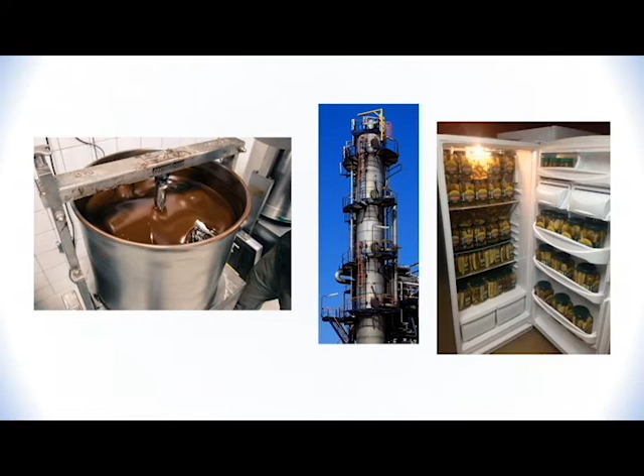Why are fluids important to learn about? The reason fluids are so important is that engineers deal with fluids in almost any process that they work on. There are fluids in every single chemical synthesis, inside distillation columns, and even inside your refrigerator.

What exactly is a fluid? Most likely you have encountered this term when someone tells you to check the fluids of your car, or in the phrase, bodily fluids. This may lead you to think that fluids are liquids, but this is not always the case. The topic of this class can seem almost laughable at first, but let me remind you what you drink every day. Water, which is a fluid. So no laughing aloud, this stuff can be the difference between life and death.

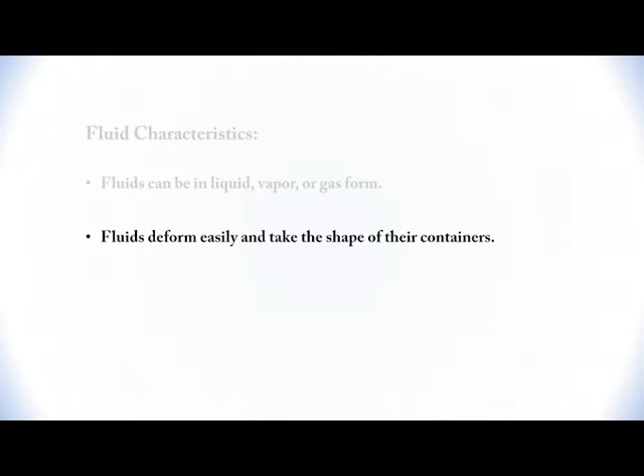Here are some common characteristics of fluids. Fluids can be in liquid, vapor, or gas form. Fluids deform easily and take the shape of their containers. Fluids are made up of randomly colliding molecules that are in continuous collisions with their surroundings.

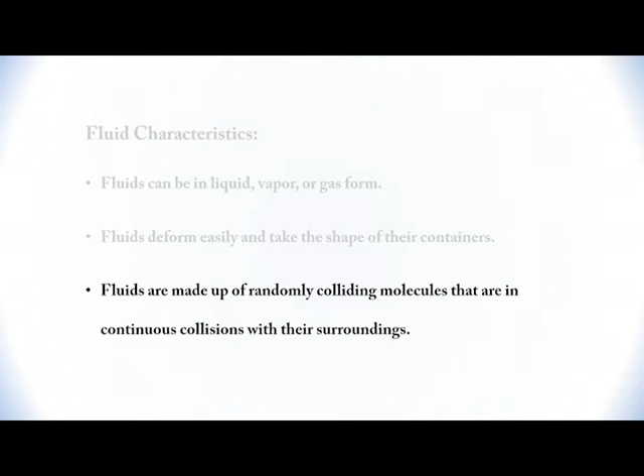The precise definition of a fluid is a substance that deforms continuously under the application of a shear stress. For example, when I apply a shear stress to an eraser, it will not continue changing after the force has been applied. However, if I do the same to my coffee, the molecules will continue to deform over time.

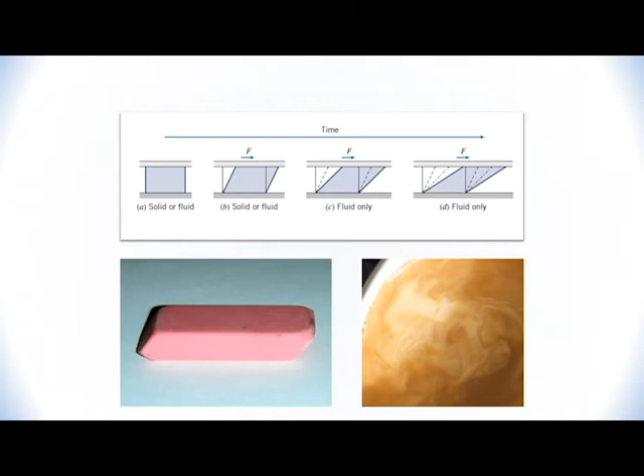On a small tangent, there are a few substances that are hard to classify. For example, is toothpaste a fluid? If you think about it, it actually demonstrates characteristics of both a solid and a liquid, which makes it something called a non-Newtonian fluid.

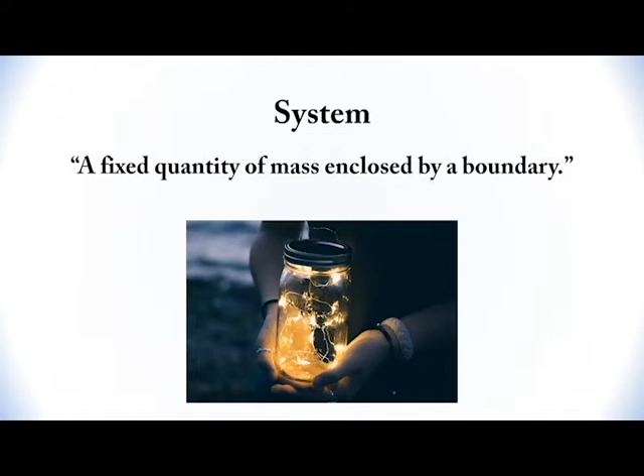To begin to analyze any types of fluids, we need to understand what we are analyzing and be familiar with systems and control volumes. A system is defined to be a fixed quantity of mass enclosed by a boundary. You can think of the system as something that is inside of an invisible container. The boundaries can be rigid or elastic, but no mass can cross the boundaries.

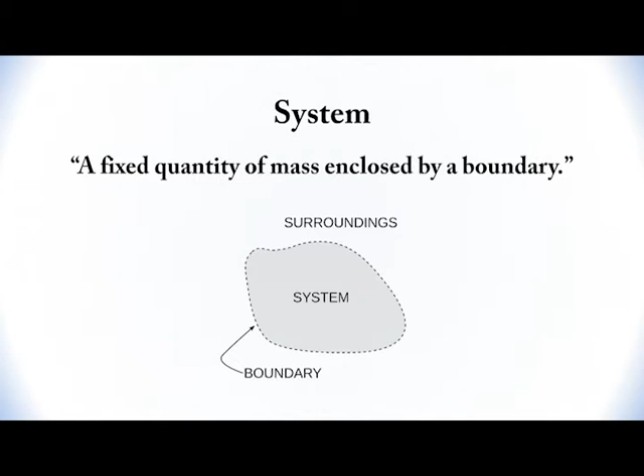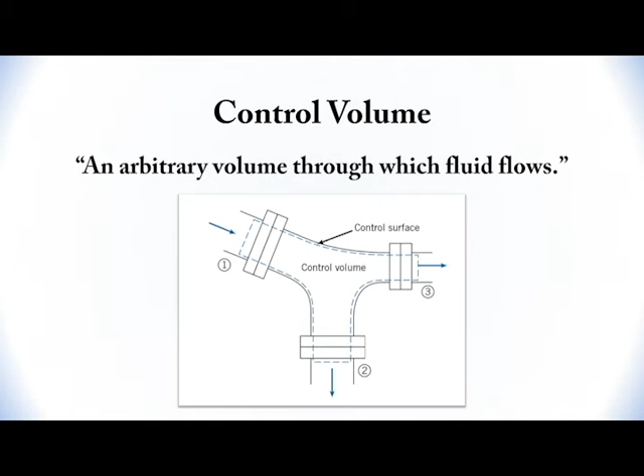A control volume is an arbitrary volume through which fluid flows. Contrary to the system, the control volume's boundaries are free to be crossed by mass. This is why a control volume is also called an open system. You can think of this as an imaginary border that is put in place inside a pipe, for example. A control volume's boundaries can be real, such as a pipe wall, or imaginary, such as a pipe cross-section. The idea of a control volume will help us later to imagine how much fluid is flowing through a certain place of interest.

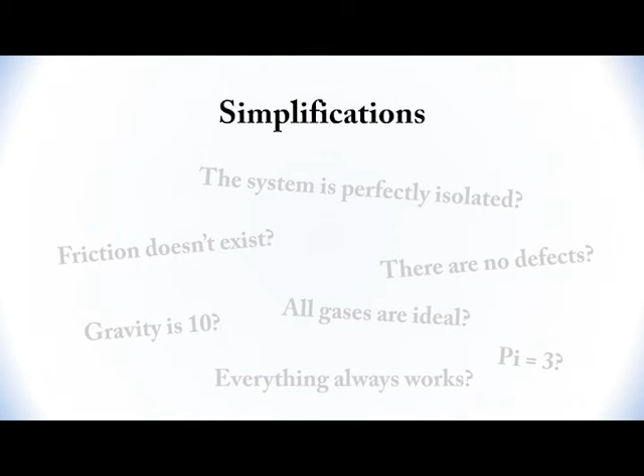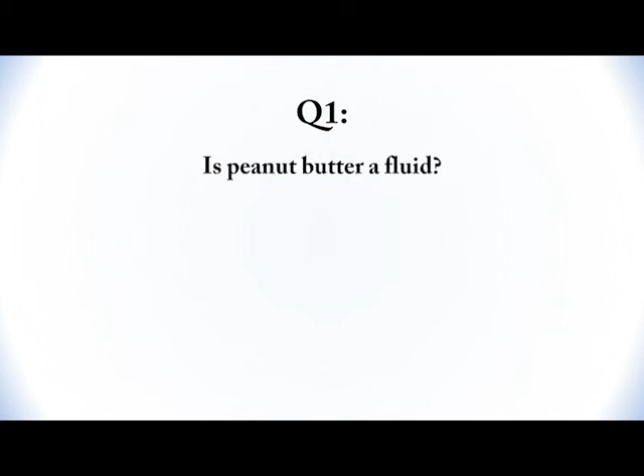To wrap up, here are some questions for review. Question 1. Is peanut butter a fluid? The answer is that it depends on its consistency. It could be characterized as a non-Newtonian fluid if it displays both solid and liquid properties.

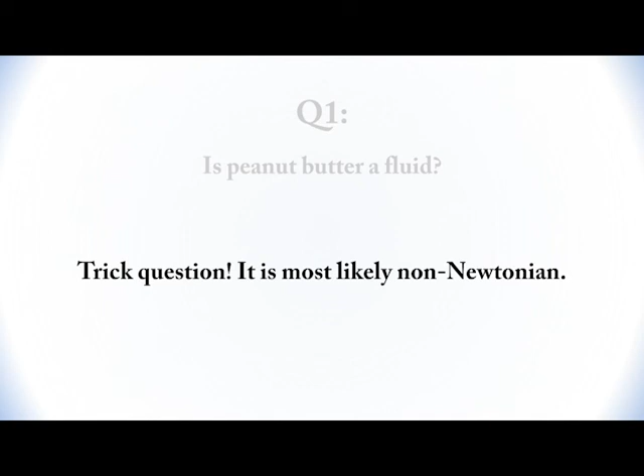Question 2. We put Mentos into a bottle of soda, and a stream of soda explodes into your face. Would we classify this as an open or closed system? Even though there is only one region of the boundary where mass can cross, where the soda exits and the air enters, this would still be an open system.